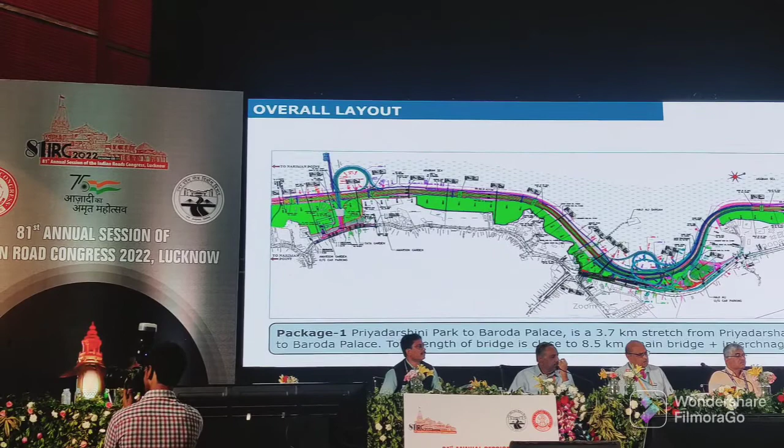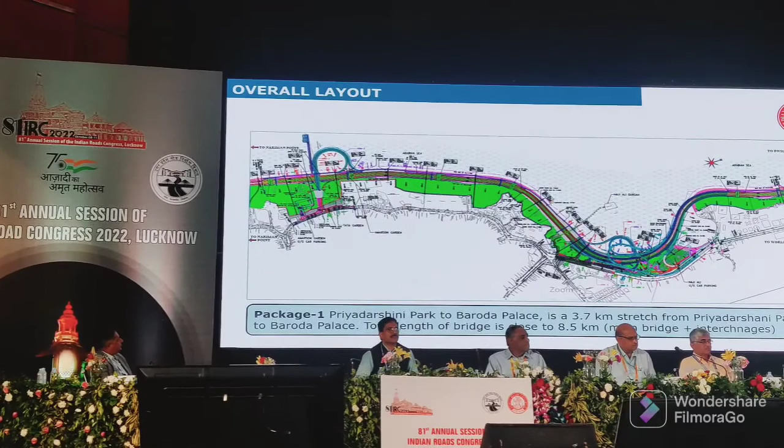This is the project as such. You can see that the road starts from the Nariman Point side. I'm talking about package 1. This whole stretch is being constructed. The package before this is the tunnel package, where the underwater tunnel is, and then this is package 1, which I'm mostly explaining. Then there is a package 2, constructed by another contractor, which links with the existing Bandra Worli Sea Link. Package 1 is Priyadarshini Park to Baroda Palace.

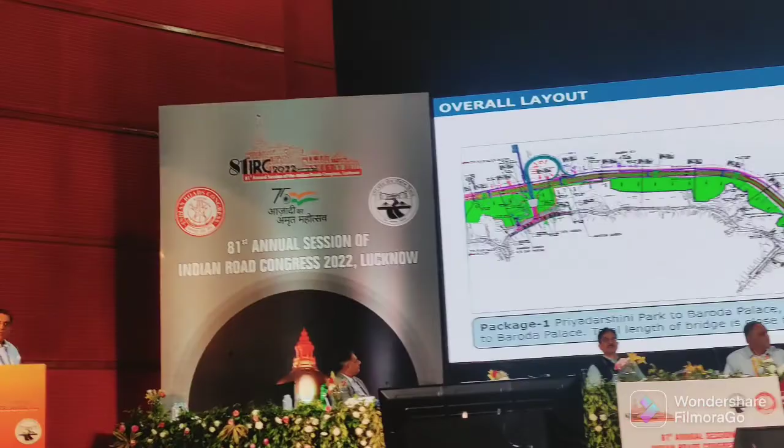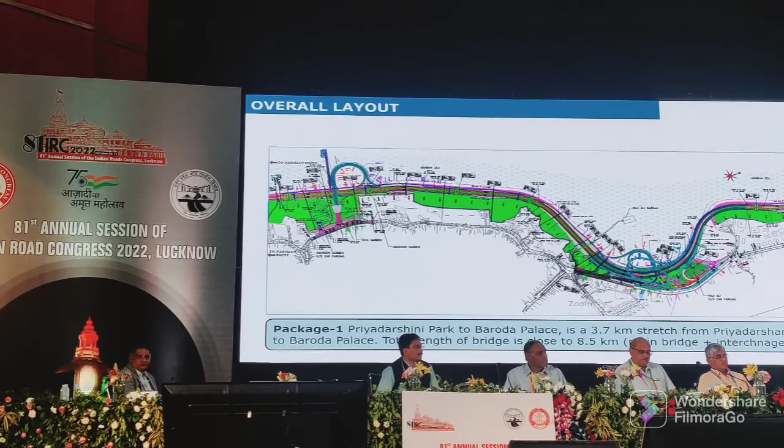It is a 3.7 to 3.8 kilometer stretch from Priyadarshini Park to Baroda Palace, and it has two unique, very complex interchanges. One is at Amarsons Garden, and the other at Haji Ali. The Haji Ali interchange itself is a 3-level interchange in this very small area near the Haji Ali tomb. It has 8 arms at 3 levels, and then it's connected with the existing setup.

The basic parameter in this particular project is seafront development. You can see the existing road, and the new coastal road is going into the sea. The area shown in green is the reclaimed area. At different locations, from the existing coastline we are going into the sea about 100 to 200 meters, even 250 meters at some places. The alignment is almost in the sea, and all this green area is being reclaimed for the future coastline after the construction of the project.

The project, as I told you, has two interchanges. The first one is at Amarsons Garden, the second one at Haji Ali, with a main line connecting these two interchanges, two lanes with a deck width of 18 meters. So the main package 1 starts from Priyadarshini Park and ends at Baroda Palace, 3.8 kilometers.

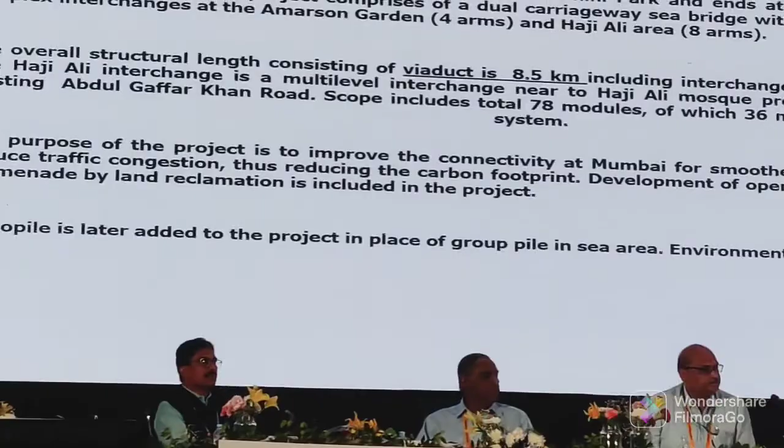The project, as I told you, comprises 1410 meter length of sea bridge and two complex interchanges, Amarsons with 4 arms and Haji Ali with 8 arms. The overall structure length consists of 8.5 kilometer viaducts, which includes all the arms of the interchanges and main line. The Haji Ali interchange is a multi-level interchange near the Haji Ali Mosque, providing connectivity with the existing Khan Abdul Gaffar Khan Road.

The scope includes actually 78 modules, out of which 36 modules are built on monopiles. I will give you the story how this monopile thing has come into picture. The purpose of the project is primarily to improve the connectivity at Mumbai for smoother traffic movement. Of course you all know about Mumbai's traffic, and this project will further add some relief to the road users.

But the monopile was later added to the project in place of group piles in the sea area. It is primarily because of environmental and aesthetics. Environmental, aesthetic and speedy construction are the three main attributes which have propelled us to think about something new on this project. There's one requirement of the project that the group piles should not be exposed.

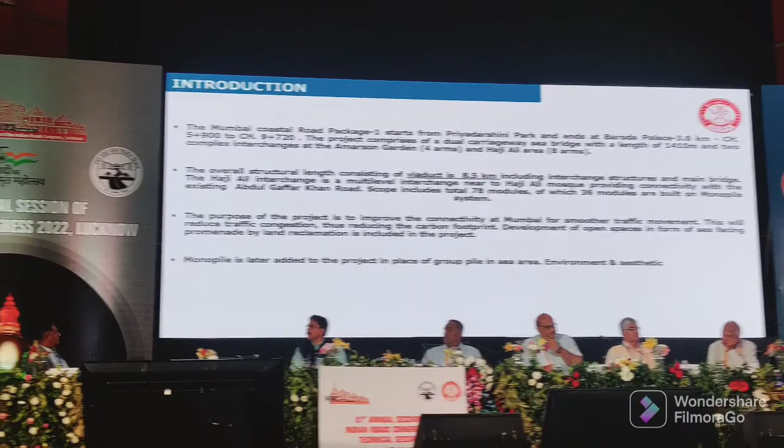If you happen to be at the Worli Bandra Sea Link at the low tide level, you find that all the pile caps are exposed. You can see that pile caps are easily seen from the outside, and it has some unpleasant aesthetic situation. Sometimes it's okay, because in a sea environment, when you are constructing your pile caps, the bottom of the pile cap should always be at the LTL level because you don't have water to cast the pile caps. It's a general requirement.

But particularly in this project, it was a requirement that pile caps should not be exposed. In fact, the contractor has quoted accordingly. But finally, when they found out the time period and put the whole thing together, it was a cumbersome process, and that's how we thought about putting the monopile in an area where most of the construction is going into the sea.

You can see that there is an area which is reclaimed, and then there is a construction area which is going beyond the new coastline also. So when it is going beyond the new coastline, constructing foundations and pile caps at the level of the seabed is a very cumbersome process, and that's how this concept was developed: let us do the monopiles in a few of the modules which are in the sea. That's how the monopile was primarily worked out.

You can see that this is the interchange which I am showing, the Amarsons interchange. There is a green area which is the coastline, and the area beyond the coastline is all on monopile. At the Amarsons interchange the strata is much better; there's very good basaltic rock. The monopile dia is 2.5 meter at the Amarsons interchange, and 3.2 meter dia is designed at Haji Ali interchange.

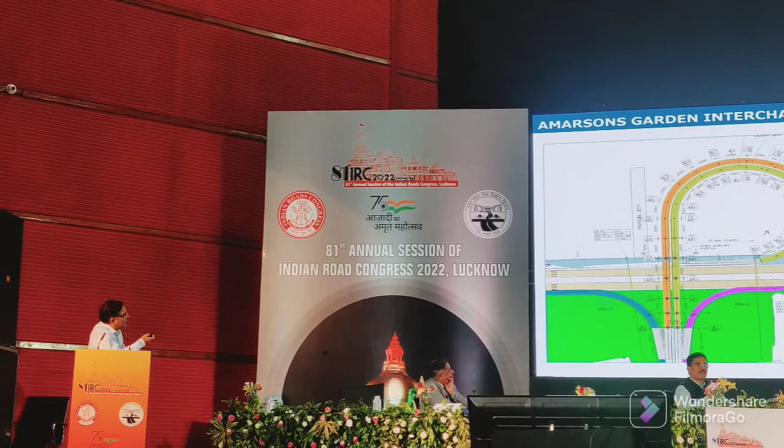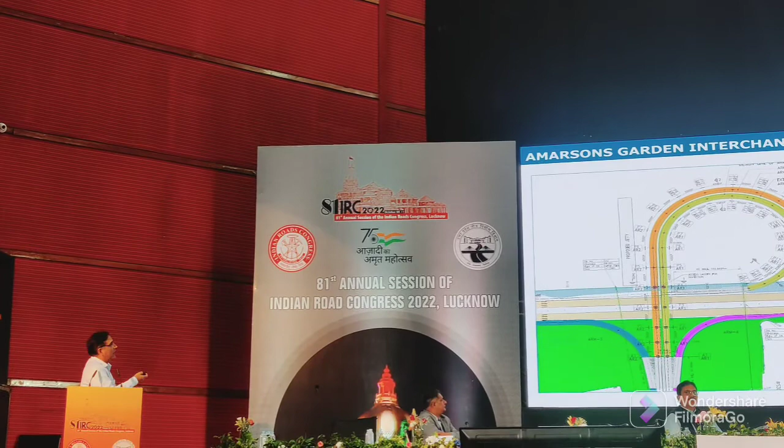So you can see that the group pile is still maintained for the area which is on the land side, and all the piles on the Amarsons interchange have been converted into monopiles, because most of the arms' foundations are going into the sea. Similarly, this is the Haji Ali interchange. It has 14 modules. The modules which are going into the sea beyond the coastline are all being constructed on a monopile foundation.

This is, and of course along with the two interchanges, the light blue color which goes right in between the interchanges is the main line. And you can see that most of the portion of the main line, because it is on the coast, is on the reclaimed area. Where there is a reclaimed area, the group pile has been adopted. When it goes into the sea, the monopile is adopted. In fact, this main line is about 18.5 meter wide, on which a 3.2 meter diameter monopile was used.

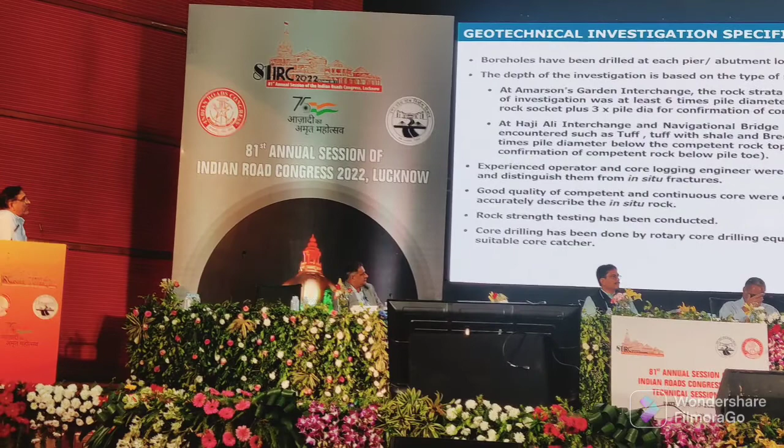See, as far as the geotechnical investigation is concerned, we tried to work out the depth of the investigation based on the type of rocks encountered at different locations. At Amarson's Garden interchange, the rock encountered was very high quality, as I told you. Basaltic rock is there, and we find that the investigation depth is 6 times the pile diameter below the competent rock top. That means you should go 6 times the diameter below the competent rock top in case of a basaltic rock: 3 times the pile diameter for the rock socket plus 3 times for confirmation of competent rock below the toe.

And similarly in Haji Ali interchange, the navigational bridge area, there is a comparatively weaker rock formation; it has tuff with shale and breccia. The investigation was further increased, and that came to somewhere around 7 times the pile diameter.